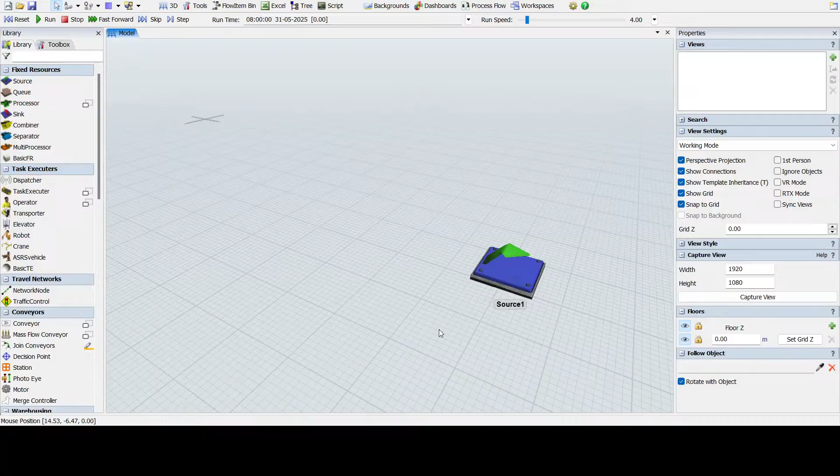Yes, and I hope these technologies and tools would have been taught in schools and colleges at my time, but currently now they have started teaching these in the colleges as well, and in the universities as well. And yes, we have reached our time, that is 8:15, and here we start the session.

Okay, so you see here we have the source being placed. Source is from the category of the fixed resource. I'll just remove that. This is our FlexSim model environment. Okay, and if you could see what we have, Amira.

Hello, hi. What is the plan of this live? What will we see about task executors? Great, so let me just talk about what we are going to have today with the task executors, right? So thanks, I'll just put that thanks. Thank you, Amira.

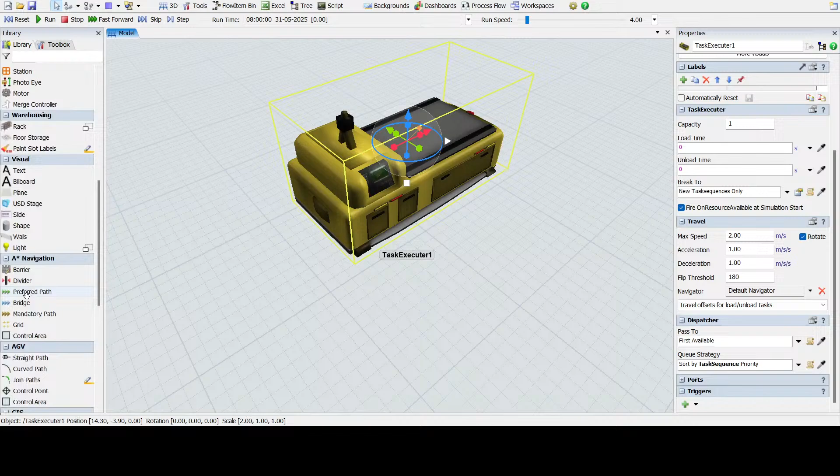And now let's go ahead, beginning with the task executor. So I have already created detailed videos about everything - what is this task executor, the properties, capacities. You can look into the playlist. I have done that already for all the elements available here, and the videos are still going on, and more new videos are going to be coming continuously on the LeanSimCorp channel.

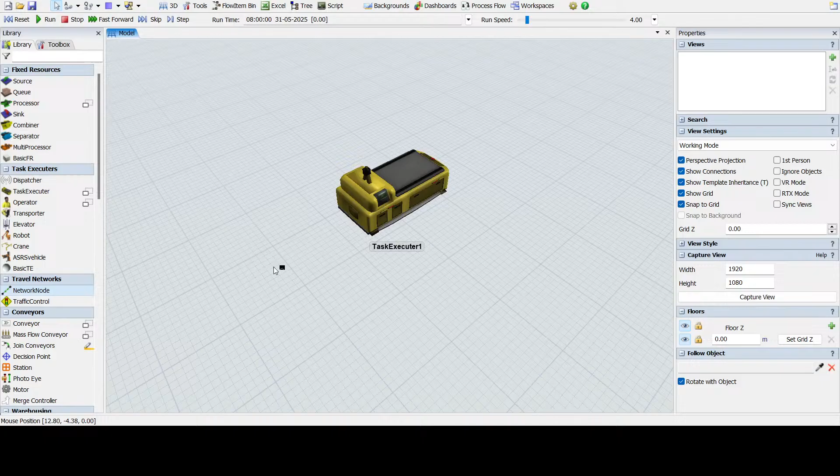What we are going to do, as I mentioned, is look into the difference between the network nodes and the task executor, AGV. So let's create a small setup.

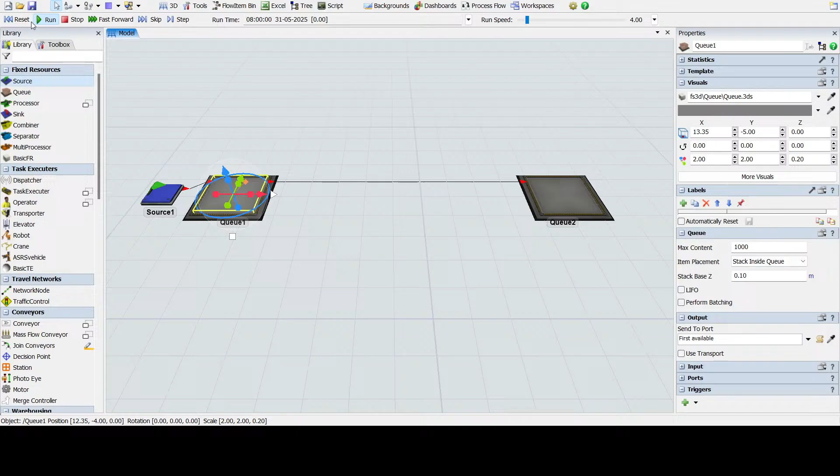Initially I'll just reset and run. You're directly going to get the boxes, right? But if you want to have the boxes transferred by different types of entities, then you're going to use the task executors.

Let us use the operator first, who is going to transfer the parts from the queue to this particular area. If I check this, use transport, he is basically going to transfer this material, like you already know about this.

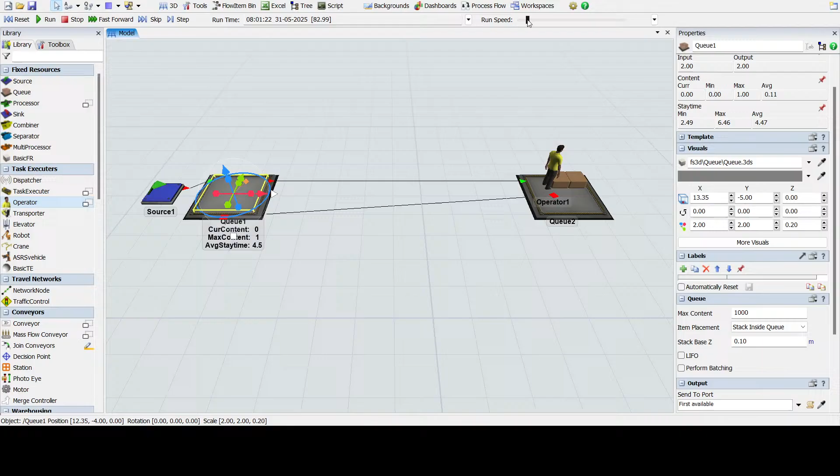Now the operator goes. If you see here, the difference is that the task executor goes with the shortest path possible, the least distance. It will basically go diagonal or a straight path, so the least travel distance required would be followed by this operator.

Now I'll just delete this operator and let us bring in a robot. Say this robot is going to be used for transferring the material from one area to another. But now, what do you see here?

The difference, right? This robot is directly putting this thing from here to here. I don't know from where it is going, it might be going through the air. So that's not a good thing.

Now what you need to do is use the six-axis robot. You want this robot to not only pick this up from here, but also travel and place it down, right? Great, so that's what we are going to make now.

Going into the network nodes, I am dragging out a network node here. Let me move this out, and I am making this a pathway. All these are done by the A connection. If you don't know how to make this, you need to use the A connection, where you connect to this node, and you also need to connect this queue to this node.

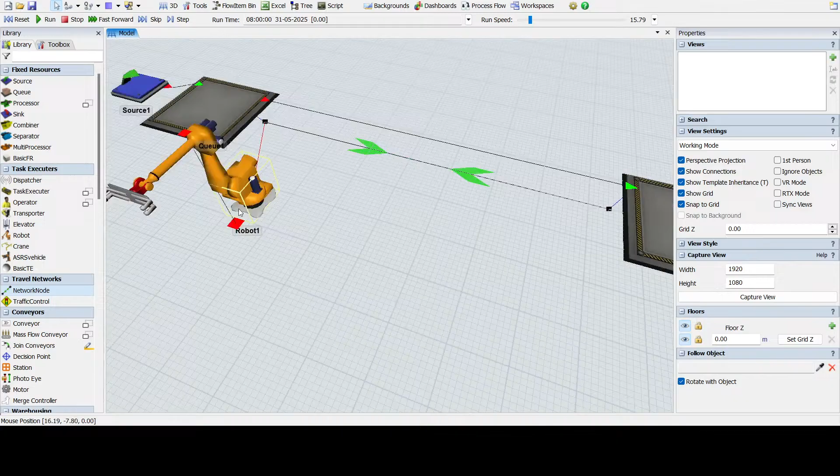The blue colors are for the objects which are going to be connected. Red color is for the task executors. So now we'll just reset this and run it.

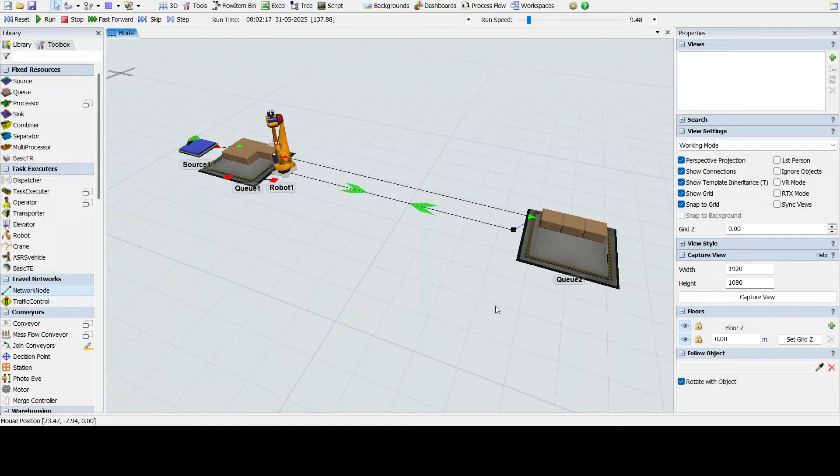So what's happening now, guys? He is moving to the particular location, picking that up, and then unloading it. There must be claps and likes, come on.

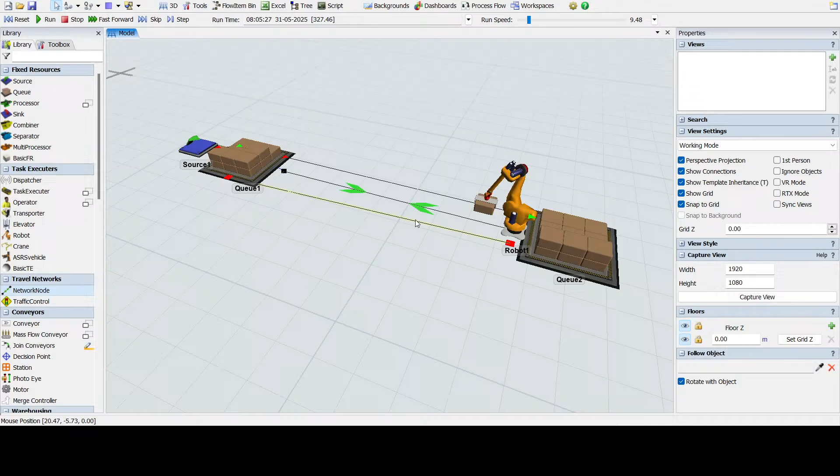So here is what we have - this way the robot can also be used in order to transfer the material from one part to another location. So you can use this six-axis robot in this manner if you want to transfer the materials accordingly.

Now what we are going to do is, I'll just remove this robot. In robot, you can see there are multiple stuffs here. We already mentioned in the video where we had robot put it into, but there are multiple triggers here as well. These triggers are very helpful if you want to perform specific things onto the object or onto the robot based on the triggers you had.

Let me see what's going on here. Amira asks, in this step, can we use the emulated variables from the process flow to control it?

Yes, definitely. So what you can also do is use emulation - you're going to use this variable right here, and this one, and here probably you're going to have this OPC UA, OPC DA.

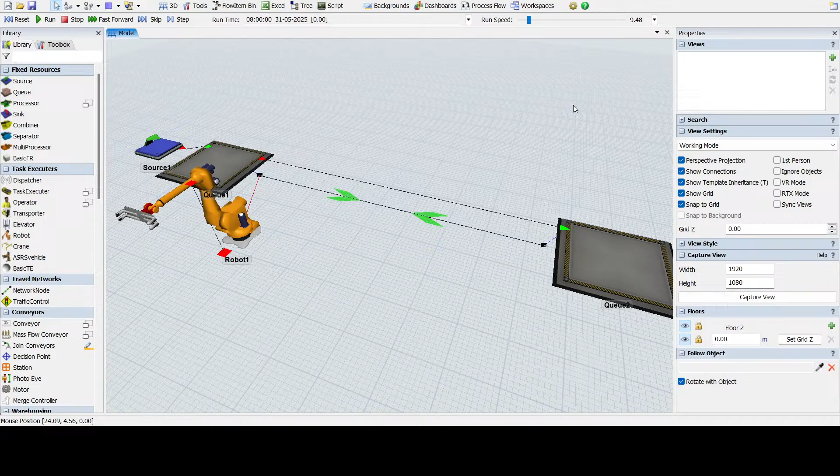Here you need to write an event. Whenever you're going to get a detail from your server saying you're going to have say 1, then your robot should start. If it comes 2, then your robot should move. So what happens in emulation, you just need to fetch the value, 1, 0, boolean, whatever you're going to get it from the PLC and the server. But the backend coding you need to do in that process flow or in that variable. You need to send the message, then from the message you need to control the start and stop.

To answer your question, it is possible. What you mentioned is, in this step, can we use emulated variables? Yes, we can use emulated variables, but just to move the robot, to tell it okay you start moving now, okay you stop now, that you can do here.

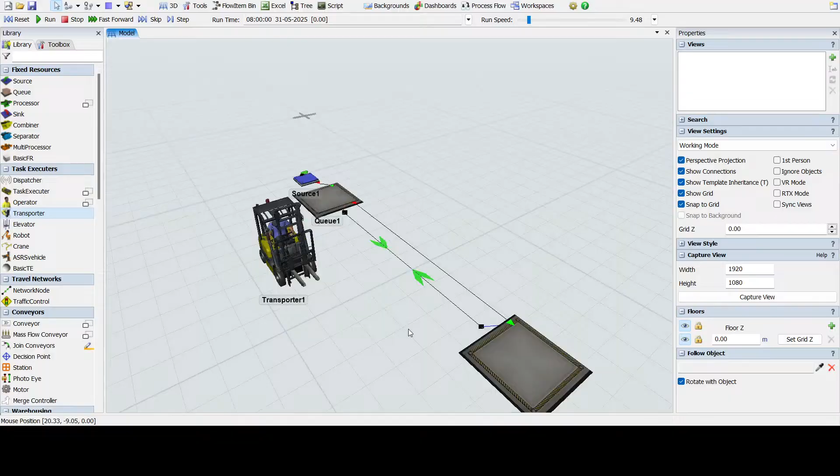So what I'm going to do now is let us delete this robot. What I wanted to say is that if I just put in this task executor and connect this, this is a forklift now. When I just reset and run this, I'll just move this here and show you how it is moving.

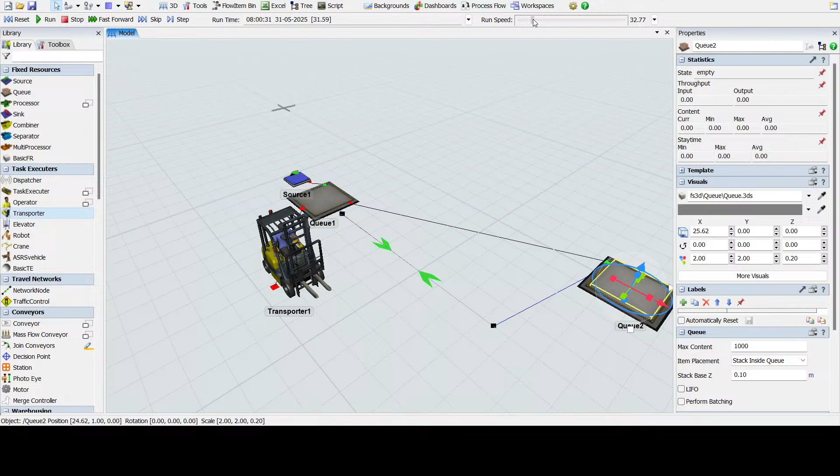So this task executor, if you see, he is not following this path. Why? Because we didn't connect to that. So it will be going this way, that is the shortest distance I have mentioned, that is what he is going to follow.

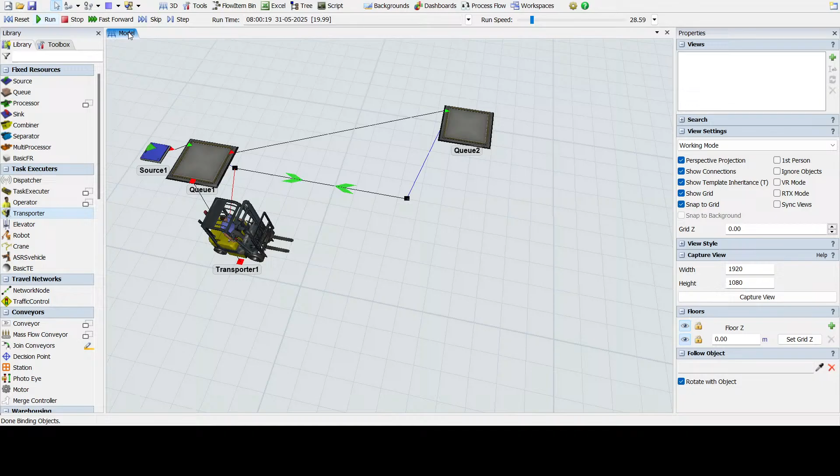So you need to be very specific that you need to connect both these objects here, and also the forklift to this area here, then only he is going to travel through that area and use that particular path. This way it's going to be carried out.

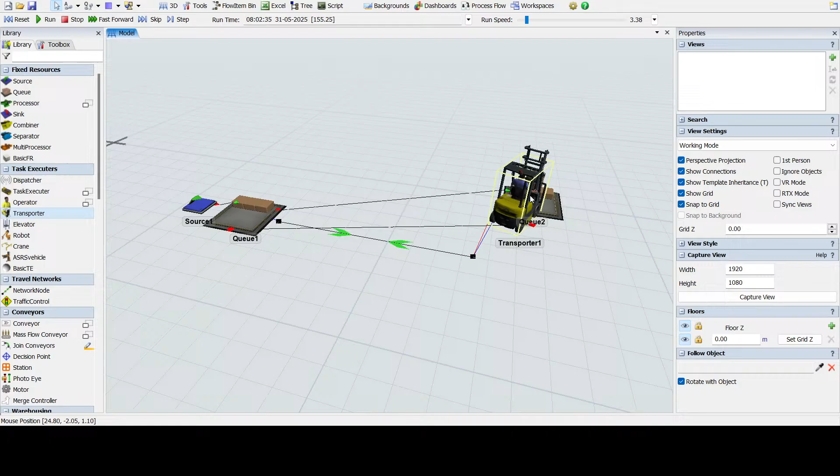Now say you're going to need multiple stuffs in there, like multiple parts together. This is also possible, it's just a matter of changing the capacity of that.

Now what we are going to do, similarly it is for crane, so crane doesn't require anything. Then when we talk about this related to network node, the important part I wanted to show you was that the robot can move from one place to another using the network node.

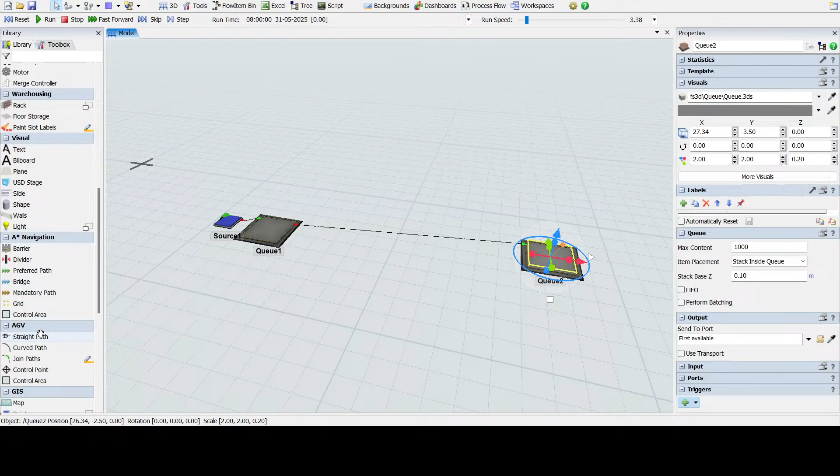It's very helpful. Now what we are going to look into is we are going to check about the AGV now. Let me just remove this and create an AGV network. Again, AGV is basically a different path structure out there, but the AGV comes under task executor, only the paths are different.

So I am now creating this curved path here, and I am now putting in the control points out in there, here are my control points.

Now we need to connect this control point with my objects there, and I am going to bring in my AGV, that is the task executor, again in the task executor here. Yes, you are going to have trucks, airplanes and all these perform accordingly.

Now what we are going to do is we are going to connect this AGV task executor there, the travel location out there. Now let us check whether my AGV is transferring the material for this AGV particular path, let me just run and show you.

We are going to look at multiple interesting stuffs for this AGV, so do not miss even a minute now. I'm just running this. Our task executor has started moving out, it will come at this control point, pick it up, go to that area and unload this.

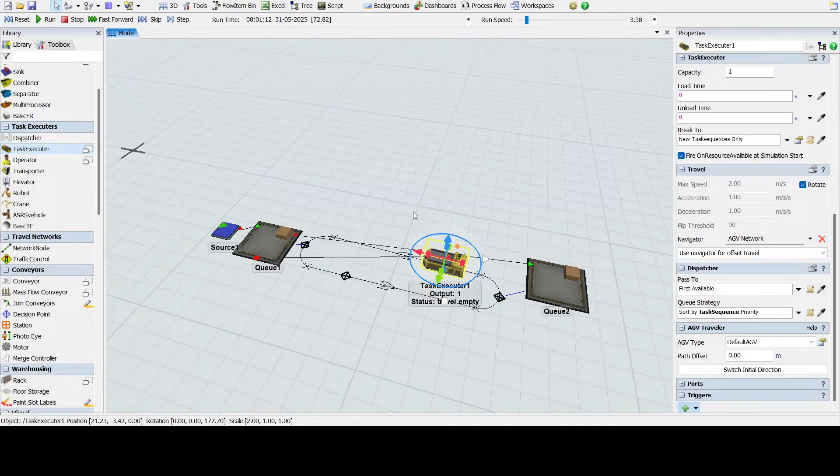So now this task executor. The biggest thing I was thinking about is why is this way? You cannot enter your speeds for the AGV here, so how can I change the AGV speed? The AGV speed now needs to be changed by right clicking on your AGV network and then coming to this area out here.

Now here comes your complete AGV network properties, which is very different from your network node stuff. The network node stuff is just nodes placed out there and you're connecting those and it's moving. When we talk about the AGV path, it's a complete bomb of everything, that particular stuff.

So if you look in here, we are going to have different stuff. You're going to have accelerations, you're going to have the speeds. You can modify those forward speeds and reverse speeds. You're going to have the battery usage here, and you're going to have rotation speeds as well.

Now the units are going to be similar to what your model units are. Whatever your model units were, like if you go to the model settings, meter per second, it's meter per second squared, it's meter per second, and batteries are in amperes.

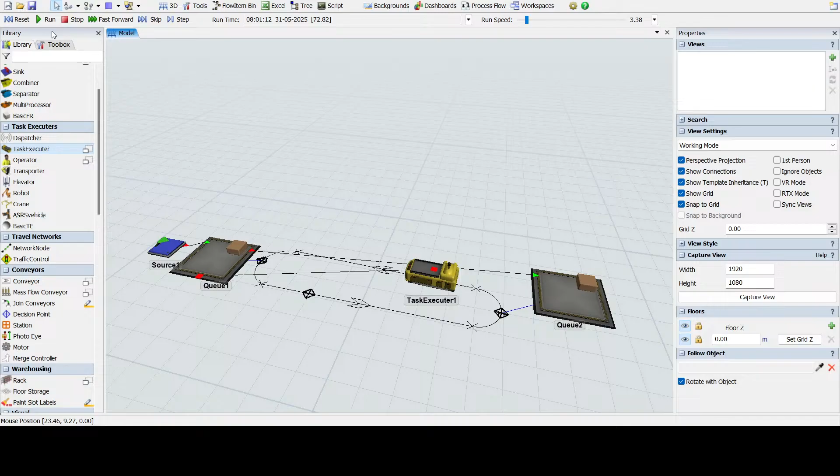Change the capacity of this AGV to 3, and I'm just resetting and running this. What happened is, even though the capacity is 3, nothing is happening.

Let's do this now, I'll change this interval to every 2 seconds, and then we are going to have multiple parts. I want to show you something interesting now. So the 3 parts are now coming on the top.

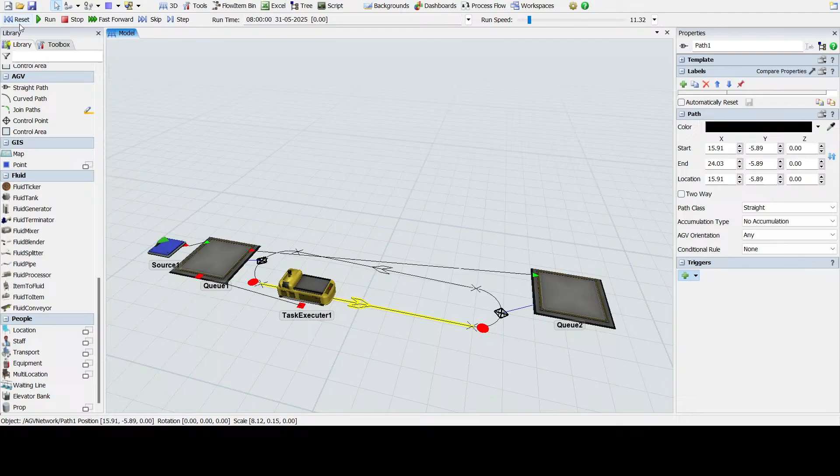What if I want to make it as a tugger? I want to make a tugger, but visualize it as a tugger - not a pure tugger, it will just be looking like a tugger. Let's go into the AGV network properties. We are going to attach it as a trailer, reset this, and run it.

Yes, just look at this guys. You're going to have this train-like structure moving behind, and that's going to be a particular thing like this. What you can also do is attach empty carts to this AGV.

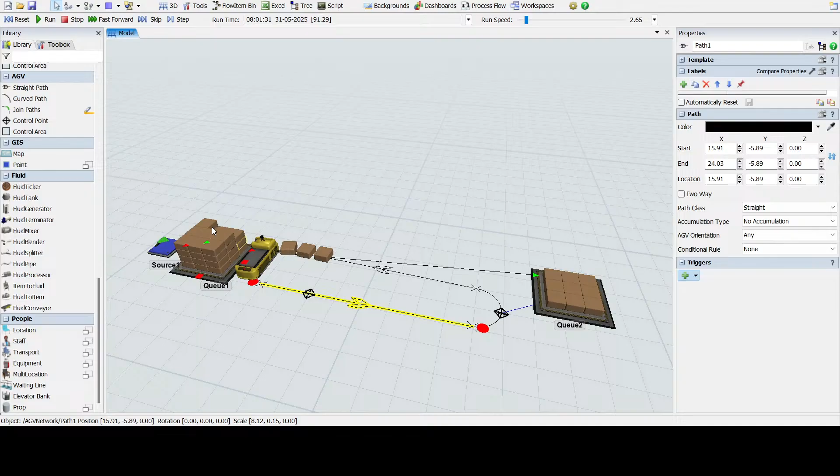Boris says something - excellent explanation about Flexsim, I'm following you from Bolivia, we have several people who are going to follow you. Thank you, thank you very much Boris. I really love you, please share with your contacts, multiple people, several people, and let us make them part of our family, right? I really love you, thank you, thanks a lot.

Let me give you this great emoji. Okay great, thank you, so okay great.

So we have this tugger been made. So I was talking about that, you can have this empty cart, and in that empty cart you can put in these boxes, and then these boxes will be transferred ahead. But this is the simplest way to analyze how this tugger is going to behave.

Now when you go here, you're going to have battery, idle, and recharge settings. So whatever rates you want to put, like one point mentioned was AGV charging logic - you can check here what your idle rate of discharge is. You can get it from the vendor details and put it here: the recharge rate, the idle usage rate, and the capacity rate. These rates you can put in, and based on that, the AGVs are going to be discharged and charged.

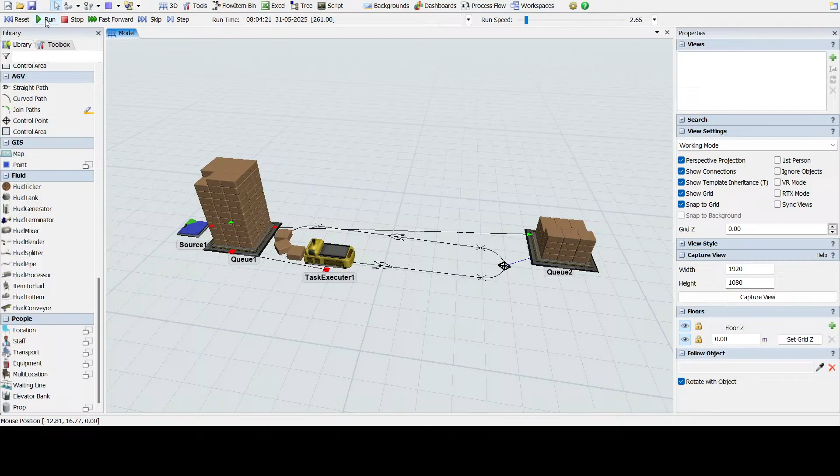Now say for example you want to put in the AGV battery details onto it. Let us do that now. What we are going to do is, on load, whenever my AGV is going to get loaded, I am going to put a battery details onto my AGV. Okay, so here I go, I put in a label. Let me put a label of battery level.

Okay, and yes, let me copy this. Okay, now what I am going to suppose to be making is, okay, so let me put this as integer battery level. Basically I'll put it double because then I also need it like 99.25, 99.5, right?

So here I'm putting like AGV dot, you're going to get this. AGV is going to be your current. AGV equal to current. Let me just close this. AGV dot, you're going to now have battery level. Okay, great.

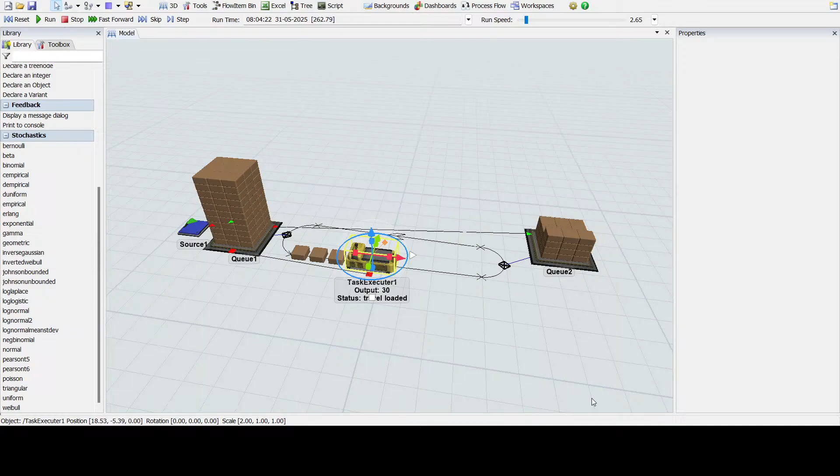Okay, so now what I'm going to do is I'm going to print in the label value of this, as the battery level here. So let me make this okay, and let me make this run, and let us check how much battery you are going to get onto the AGV from that, if we were to check that out.

Oh, one second, what happened is current dot battery level, here I put in current dot. So here basically I'm just closing this and I'm just resetting this.

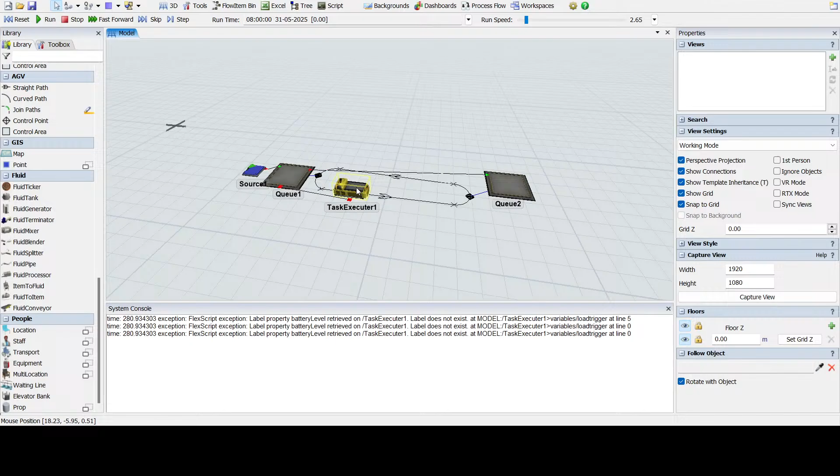AGV equal to TE dot, okay. So let me check with the syntax and I'll just come back. I don't remember that now. One second, I'll just check that.

Here comes the AGV syntax out, and here I open that. Okay, great. So now I just click on this, okay, and now what I do is double battery is equal to AGV dot, these properties is what we should get in. Okay, so let us look at this.

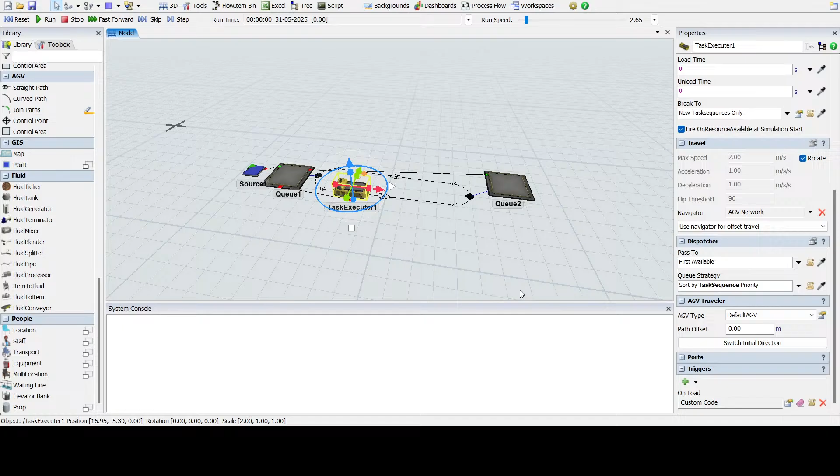What has happened is AGV was defined as AGV, which is equal to again AGV as a current. Now if you see, I am now able to apply the properties of the AGV to this, so now we are going to get the battery level, guys. Okay, so here I put it here, and then what I'm going to do is current dot battery level is equal to the battery level. Okay, so we have got a value for the AGV's battery level, and then we have placed copy pasted it onto that. So you need to remember the syntax: AGV equal to AGV current, then only you're going to reference this AGV with its properties of the AGV.

Okay, great. So now I'm just resetting this, and I'm running this. Okay, I'm just running this. No errors now, it's errorless. And here comes the battery level, that's 99.87. Okay, this is how you can check the battery level of yourself.

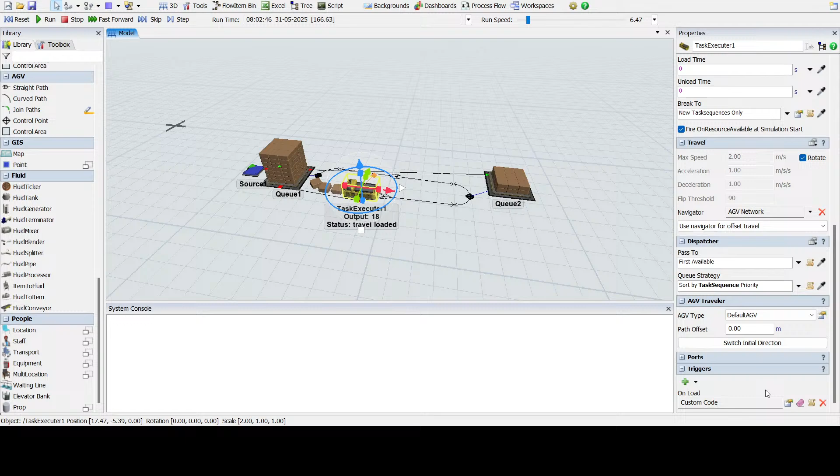And whenever your battery level falls below something, you can put in another logic for that particular thing and ask it to travel to that particular location and stuffs related to it.

Okay, so now let us come back and understand what are the differences in the AGV network. What you can do: you can attach the loads at the trailer, you can mention the gaps. You can put in your charging details here, which we just saw how it is visible. In the control points, you are going to have these different process flow details you are going to put in. Accumulation types, here you are going to put in proximity detection, like when your AGV should stop, at what trailing edges, and details related to what should be the intersection stop points. So it is based on the modeling part. This is based on the proximity part.

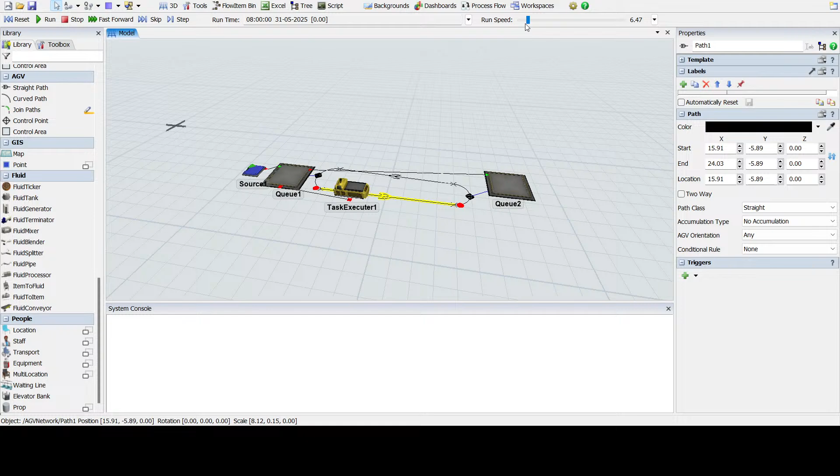When you go to the deallocation stuffs, that's nothing but a very important point, because on that it's what we are going to have different steps being taken care of. So one thing I'll just show you, if your simulation model is not getting this detail.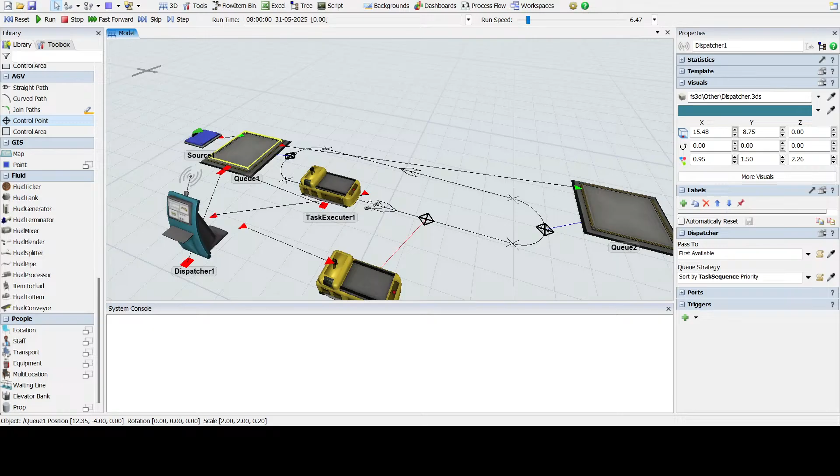I'll just put in a control point and another AGV out in there. Okay, so we have two AGVs now, and let me put in a dispatcher to be connected here to this queue, and from this queue we are going to connect it to the AGV, and let me just remove the AGV connected there. Okay, now when I reset this and when I run this, what are you going to see?

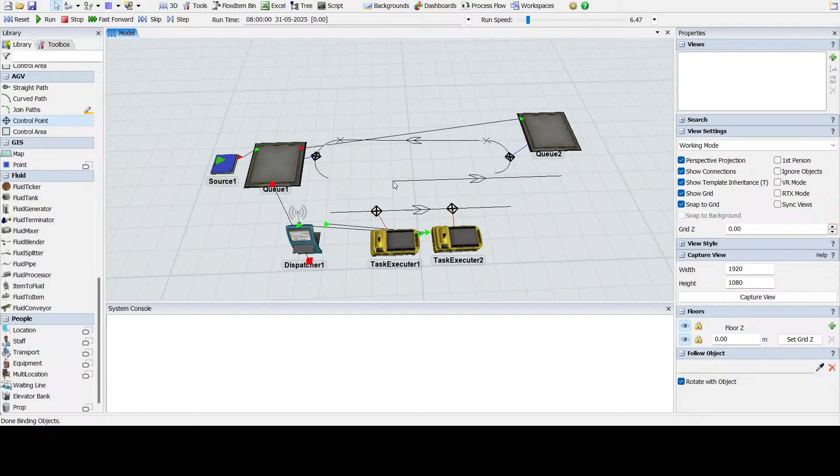Okay, it's going to be very critical now. So what we are going to do is have these different paths out here. Let me put in control points. Where are the control points? Yeah, here: 1, 2, 3, 4 and 5, right?

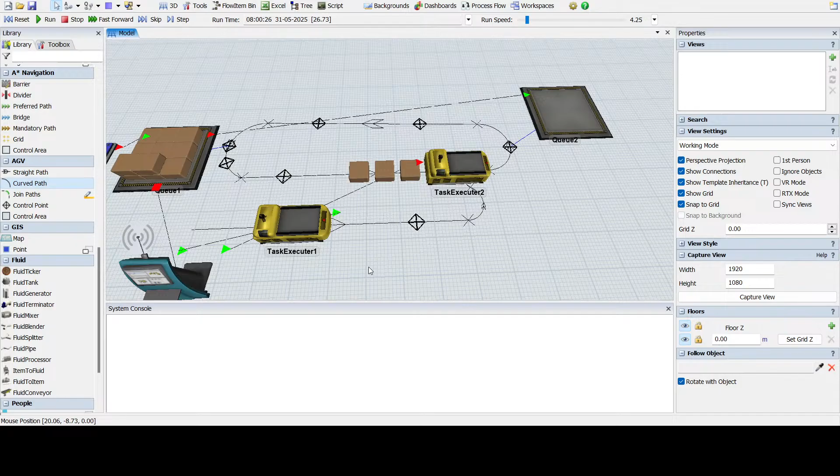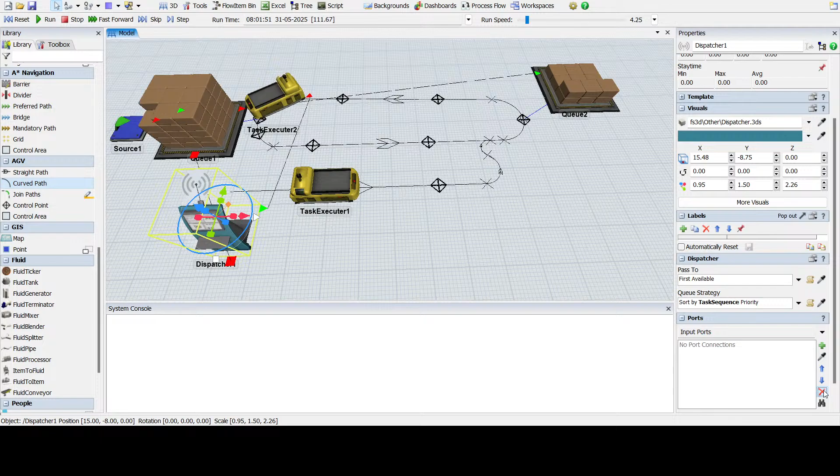Now if I just look at this, here I go into the output. I have only task executor 2, no task executor 1. Task executor 1 got connected to my first port, so my second AGV is not going. So let us connect that.

Okay, let us reset and run now. Okay, so now my two AGVs are moving, guys. You see this? Two AGVs are moving.

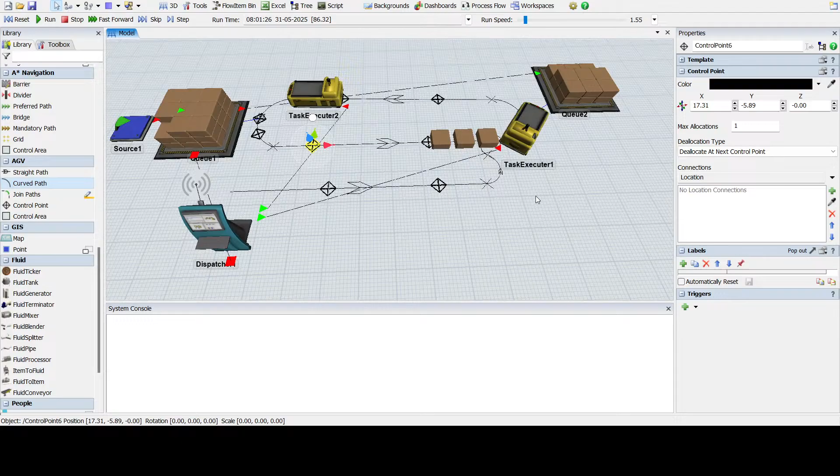Now what I want to show you is how they are moving from the control point. Just look at that. On the control point, when you click in, you see this deallocated at the next control point. So unless your AGV reaches the next control point, it is not going to leave that, and because of that your throughput is going to get reduced. Your AGVs are going to have a lot of blockage. So what do you need to do?

I'll just show you one example. Let us delete these control points now and just show you. Let us see if it is possible to have a state dashboard. I'll just stop that, reset, and let us put in these two task executors into the details. I just want to show you the blocked one.

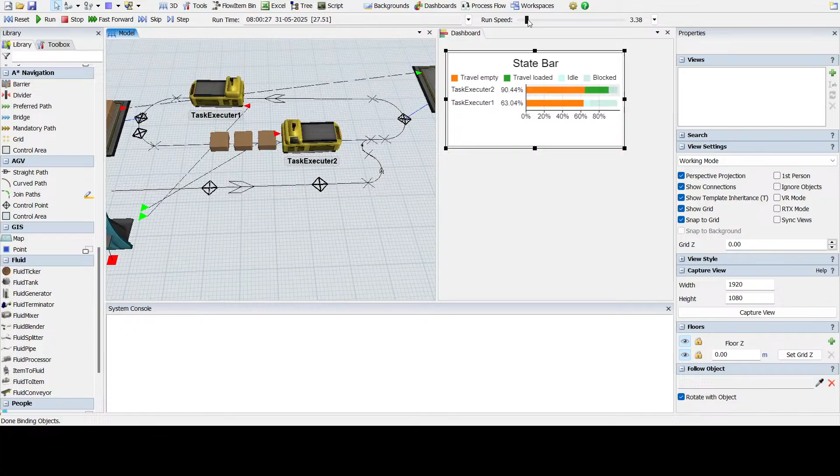Okay, so what happens is, you see this is all blocked because it says deallocate at the next control point. When you click on this when passed, you will see that the blockage will be minimum. So always try to have this - what is that - deallocate when passed.

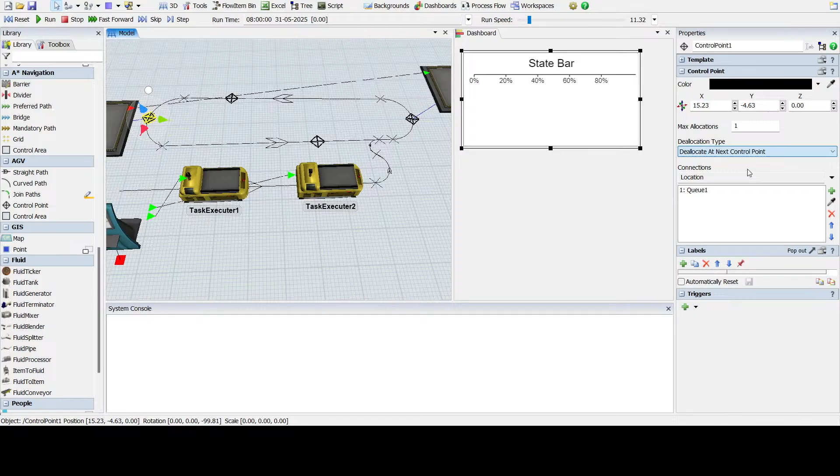The moment AGV is going to leave from that control point, we are going to have that movement coming backwards. So the blockage will completely go, and you will have the least amount of blockage available out there. So whenever you are using this AGV path, remember that the control point needs to be deallocated when passed, so you have minimum blockages on this route, helping you make this stuff quite great.

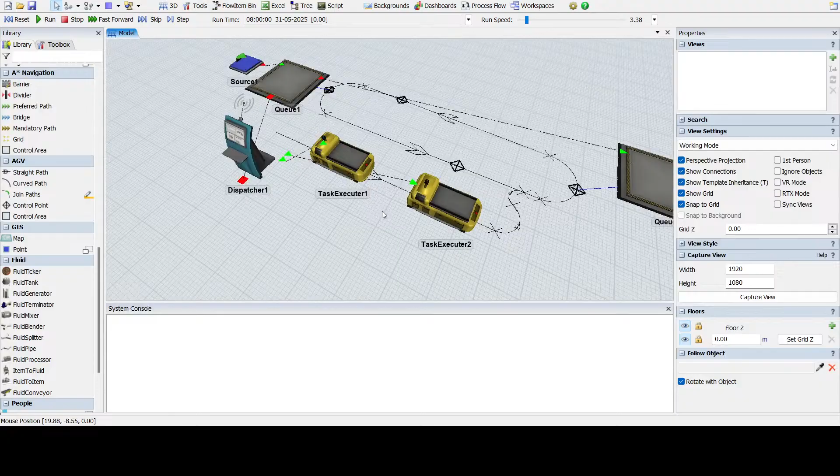Okay, so when we talk about the major difference between network nodes and AGV paths, both are going to be two-way, one-way, whatever that is. You're going to put in a speed limit for the network node, but here you are going to set up a complete speed for that particular AGV network. There is nothing like you are going to set it up for this path different, this path different. No. You can have different types of AGV types.

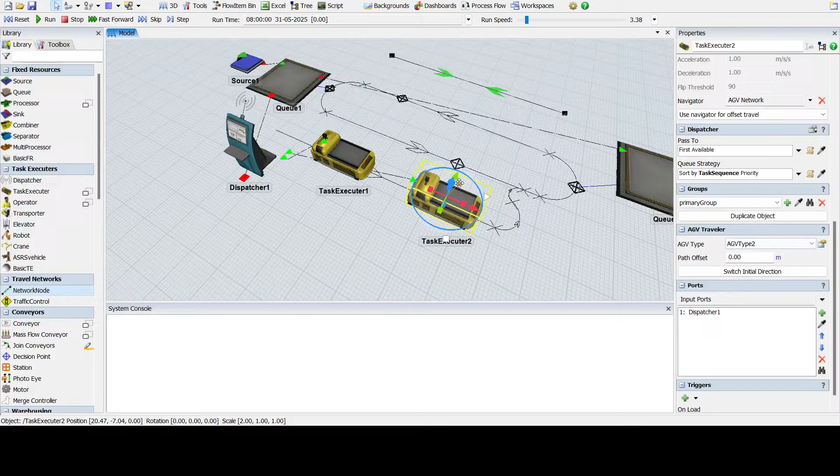AGV type path you can basically select, and you need to select from here, AGV type - which we just created, right? AGV type 2. If you want to have AGV type 2, use that, but again that is for the particular speeds which we just made for that. But you cannot have different types of speeds at these different sections in this AGV network.

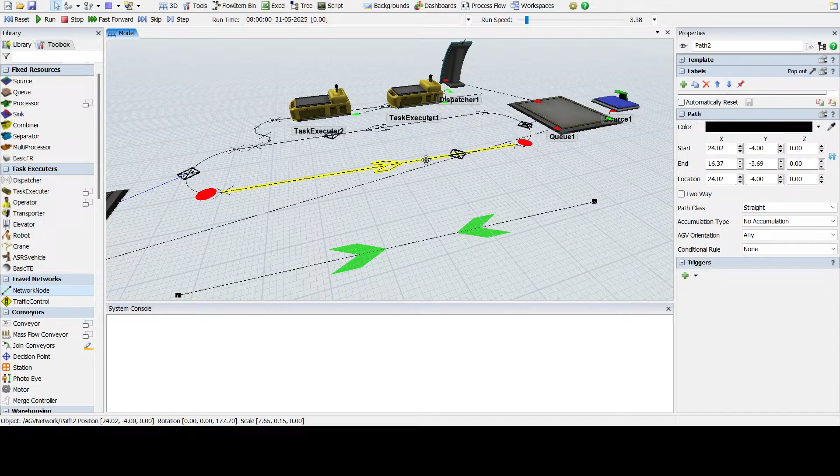But here you are having the option in the network node which you can place that. So when you click on this, you see speed limits are there - the maximum speed that a traveler can travel along these connections in meters per second. The disadvantage of the network node is that you cannot put in your curved speed, you cannot put the charging details, you cannot put your trailers and things like that which you can do in the AGV network. So you can use AGVs on this network node as well and on this AGV as well.

Let me know in the comment section whether you want to see that AGV run on the network node. If not, I will skip this and go ahead.

Okay, what is Boris saying? Excellent, we are going to write you - inbox a strong hug from Bolivia. Thank you, thanks a lot, Boris. Lots of love from me as well. Thank you.

Love you. Okay, great.

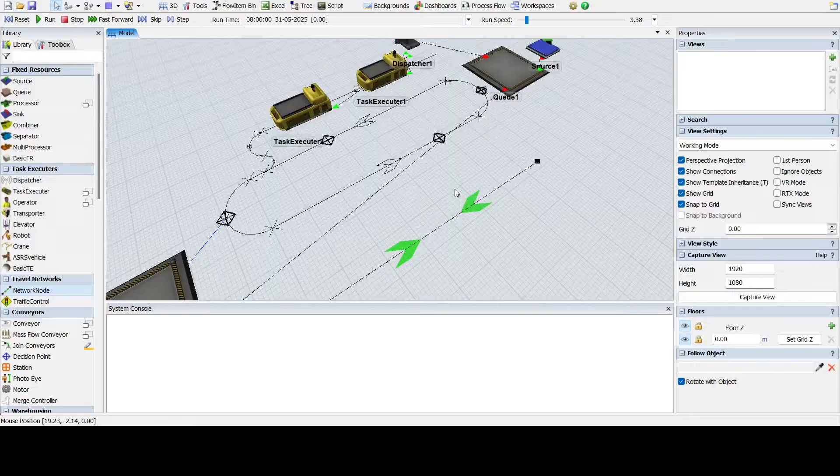Let us use AGV heat map. So heat maps you can also do onto the network nodes. Basically, if you want to create a heat map when your AGVs are running onto your network nodes, that is also possible. You can do that, but it takes a lot of time and requires backend coding and scripting. We'll do that later, but just for your information, let me know in the comment section if you want that.

Okay, great, let us have this model standing here, and what we are going to do now is create another source and another queue, and let me just connect this to this queue.

What we're going to do is send the parts to these different types of queues based on the percentage. So for send to port, you need to go here to have a by percentage ratio. So what do you tell it? 80% of the parts will go to port 1, 20% will go to port 2. Okay, let us do this.

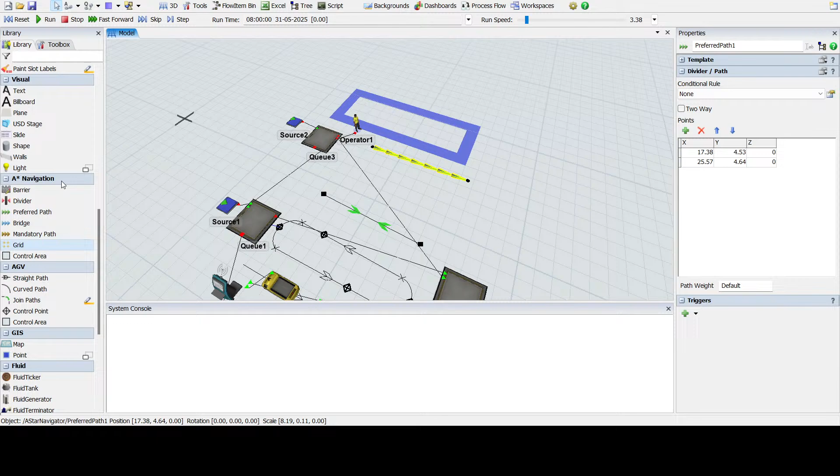So if I just put in a grid, here comes a grid. So here comes your AGV grid, here comes your preferred path. These are all A star detailings which you can use. This preferred path is going to be like a magnet, just like a preferred path. It is going to be a bridge, a mandatory path, and you are going to have control.

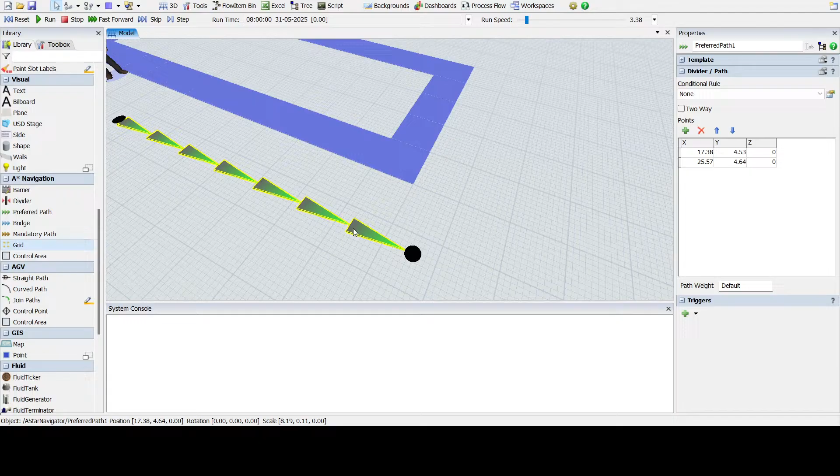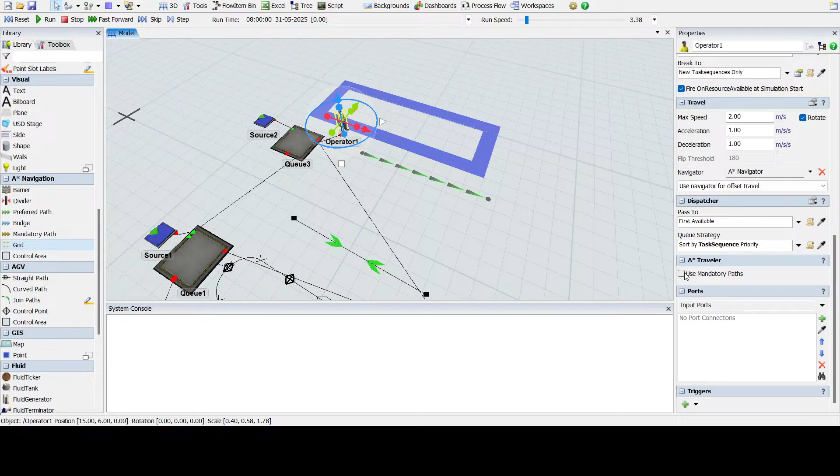But the big thing is there's a lot to remember in FlexSim, and things need to come out the right way. What I am searching for now is the A star navigation property window. Here, if you are using A star, you get this mandatory path option. You can check this if you want the AGV or operator to travel based on that.

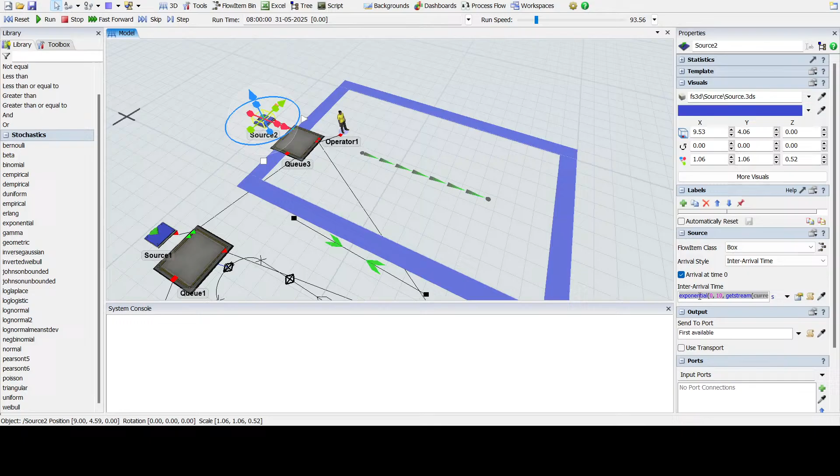So I'm running this now, let's see how it goes. Oh, I'm not getting anything from the source. So now what I'm going to do is show you a heat map, let us see that. Wow, why am I not getting it? Oh, probably we haven't checked this. Okay, we checked it now, so now the operator must be utilized. Wow, now the operator is moving.

So if you see here, this is the preferred path I have placed. But I haven't connected that operator to that preferred path, yet it still follows it. That's the power of A star navigation. If you had seen in the network node, you needed to connect that, right? Here, if you just select the AGV A star navigation, it's done, it's so great. You don't need to connect it again, there. It will automatically get connected to the AGV A star, whatever paths and detailings you have placed.

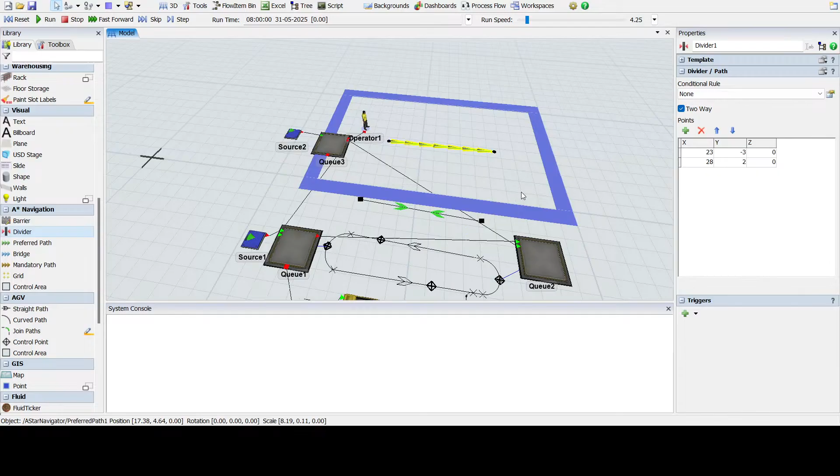Let me just put in a divider, because what I'm searching for now is I want to have that A star which used to initially come in our older versions, where A star used to be visible. I'm not able to see that now, I want to see that here in the A star navigator. Okay, great, A star navigator properties come in here in the tool, I am able to see that. So now these are the A star properties in here. Now all members are there, travel members are there, FR members are there.

What we are going to do is put in and start the heat map. So here the heat map is going to be started in A star navigator properties.

Okay, so guys, my throat is almost dry, let me have a sip of water. Okay.

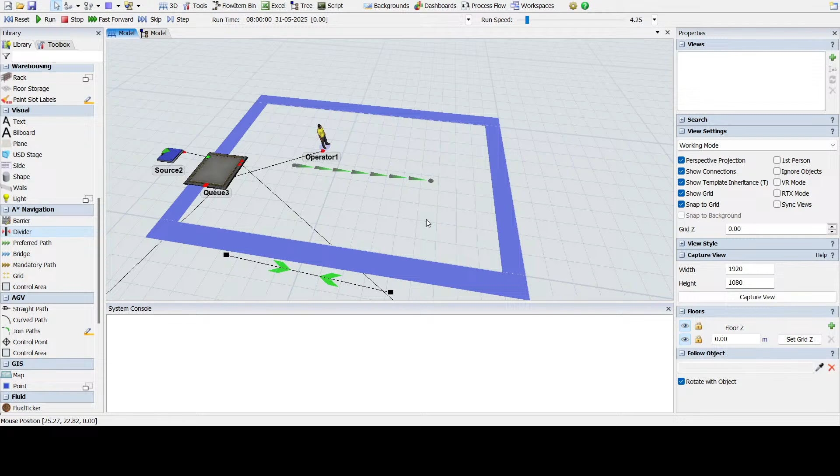Okay, great. So now let us check how the heat maps are going to be shown. Heat map colors also you can edit, but as of now we'll not do anything onto that. So I'm just running that.

Now what do you see? The operator is putting it into this area as well, only in this area, right? We need to make this grid bigger so you see everything. So let me reset and run this again.

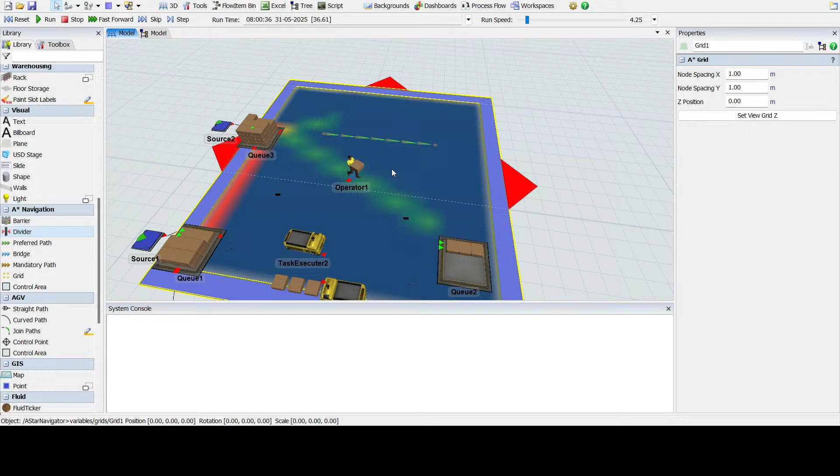Now here, if you see, the heat maps, this way you need to activate your heat maps from your A Star Navigator. I am just moving this, show allocations. Now you can see the allocations. This is the allocation power. So if you want to see the allocations, you need to check this out here. When you uncheck this, you are going to have the allocations shown as none. So what do you see here?

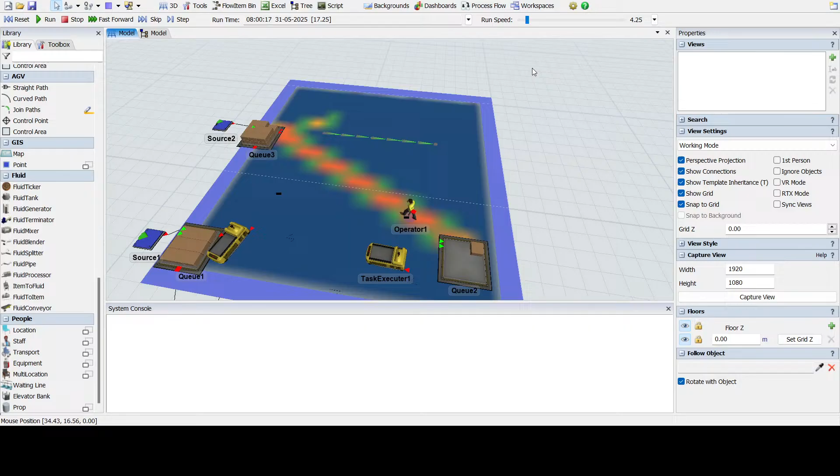You remember the percentage? We put it here 90% something, right? 80% and 20% here. You see this green is here and the red is here. Let us change and see what the heat maps give us if I make this complete opposite, 80% below and 20% on the top. Let us see what our heat maps look like.

So what is happening, guys? It's not showing you red. Why? Still it's showing you green. Can you let me know the answer in the comment section? Why is this happening? Why is it green? If you remember, we put it 80% here and it was complete red. Here it's still green even though the percentage is 80%, right? What might be the reason?

The reason is heat map depends upon the interval you are going to select. The intervals which you select are going to define that. So when we go into the conditional or the triggers in the visuals, the maximum heat value - this is traversals per time, average blockage time per traversal, percentage of the total time blocked, percentage of the total traversals. So how many times people are traveling through the particular area is what determines how your heat map is going to be visualized.

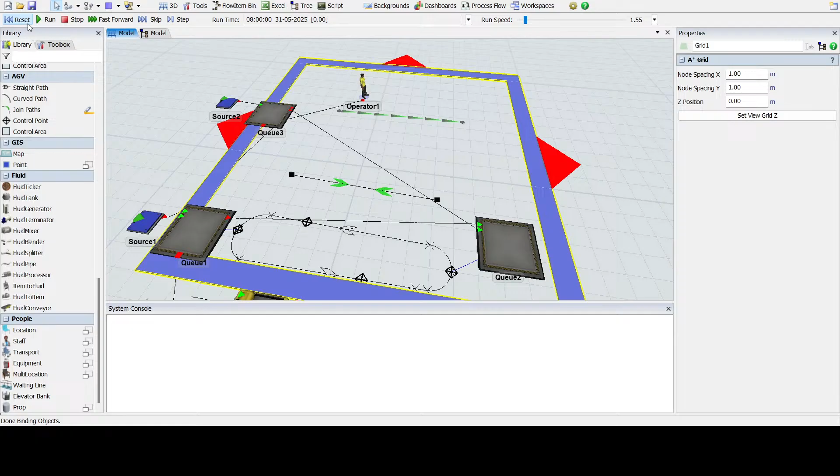So it depends on what traversal value you are going to put in there, the maximum heat value, in order to get the heat maps. You can also change the details in here.

This is really a good question, Boris. How could you graph the visual representation of a heat map? So basically, if you want to have a graph or a dashboard, or you need a value, both ways are possible.

You can get these details in terms of nodes. So basically when you go into this backend, you are going to have the details in the A star navigator properties, and there you are supposed to collect the details - the heat map total traversals, you look at this. There are a lot of details already fitted into this, you need to pull the details out from the tree. So what you can also do is get a number directly and feed that into the global table stating how many traversals you are going to have on this one, on that, or you need to.

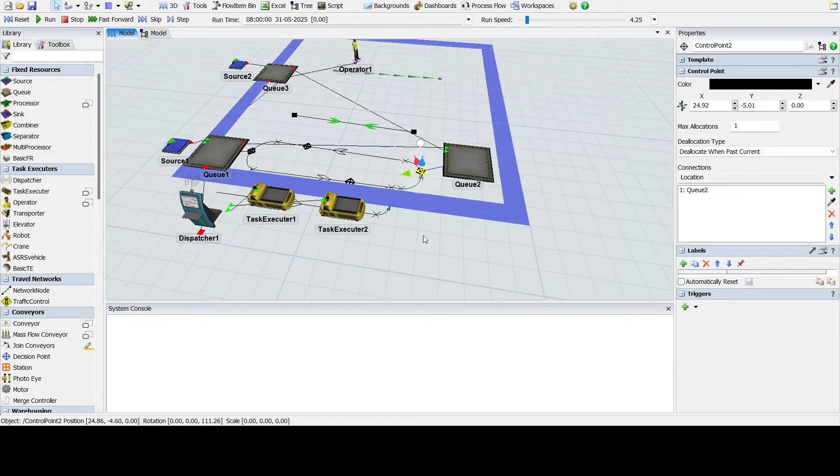Then the other point was about the different types of travels by operator. Okay, great. So we saw that the operator we used has been traveling from this preferred path automatically because he was connected to the AGV, A star network, right? Now, say I want to remove this from that particular AGV navigator. I want to use the default navigator. What he is going to use, let's see.

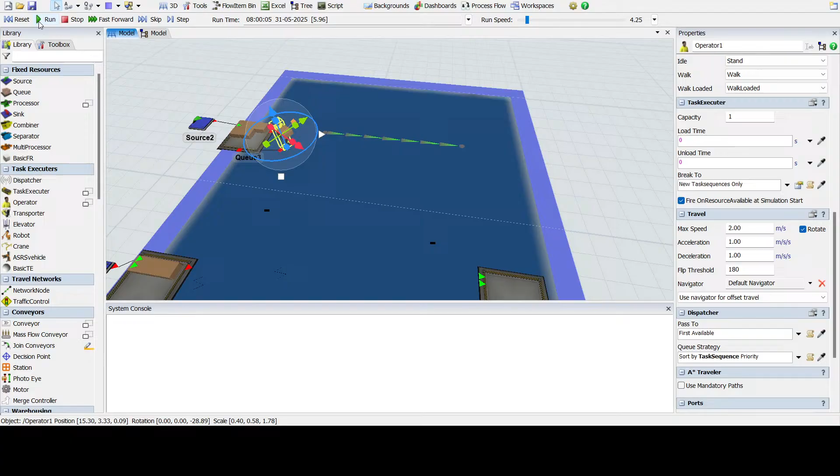Okay, see, this is the default navigator. Now, if I change this to default network navigator, you're going to get an error. Why? Because your operator is not connected to that. Even if your operator is connected to that, your queue is not connected to it. That's where you're going to get that error.

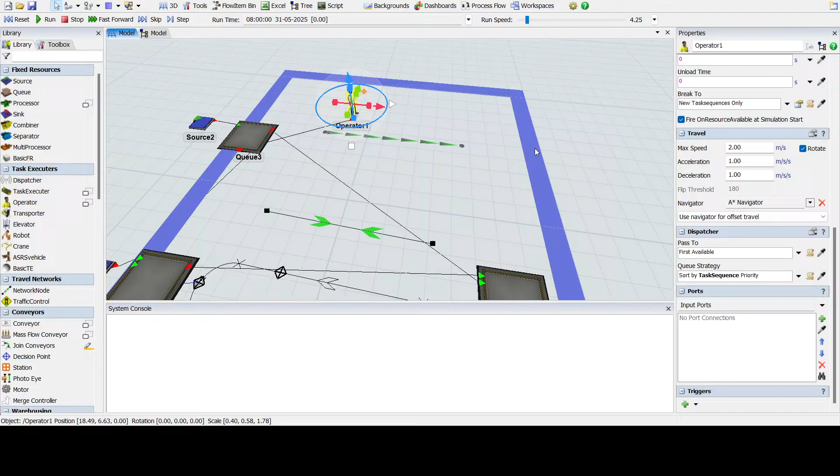So what I'm talking about is different types of travels by operator which you can make. So we saw you can use A star - directly if you see, if I put in an A star navigator, it is directly getting connected to A star. Okay, if I click here to the default network navigator, it is directly going to connect to that. If you are going to connect to AGV network, it is directly going to get connected to the AGV network out there. But the problem for us is that our queue is not connected to the AGV network.

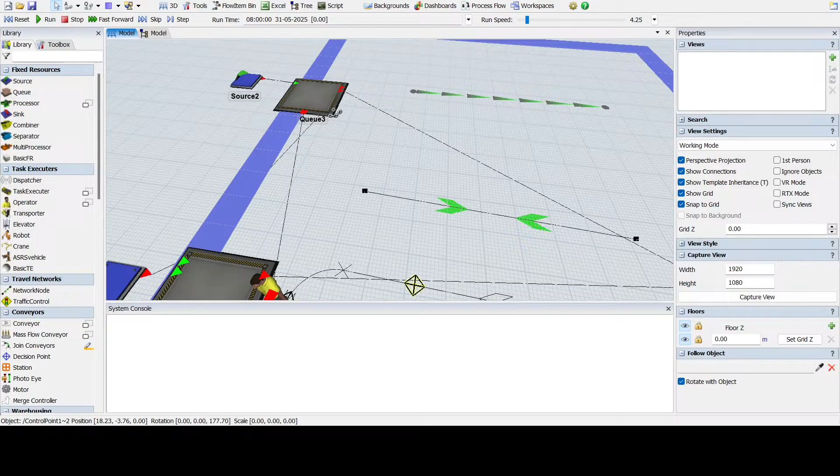Okay, so it is not that you're just going to use AGVs onto your AGV network. One second, let me just check, connect this. Okay, yeah.

See, the operator can also travel from the AGV network. It's not that only AGVs can travel. And if you could see this, it is also behaving like a trailer. So in FlexSim, it's all depending upon the path networks you are going to use. Here the operator is also functioning like an AGV. You see this? So it's not based on operator, it's based on the AGV network.

Okay, great. So this is what we saw - the best part of the network, the best part of the, what I can say, the routes - that operators can also run on the AGVs. Now, we need to do nothing more, right?

We just selected the AGV network and the operator came here. If I put in a default network, it will be disconnected from this, and my operator is free to deliver my parts irrespective of the paths he is going to have. Now, wow, look at this.

My operator is walking in a reverse direction. Now what we're going to do is check these four things. I hope you are aware, but if not, you can have a glimpse of this in a minute. So when we say do not travel offset, these are the details for this. Let us look here for the AGV.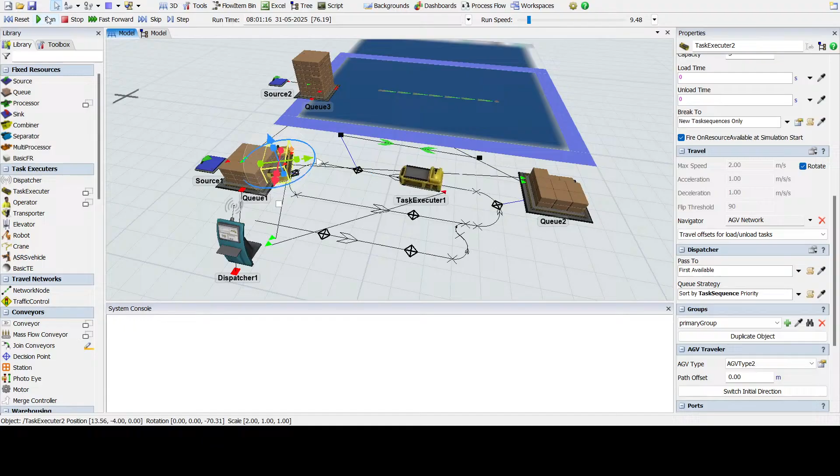Okay, nothing happens when I click on this. It's like travel, do not travel offset, use navigator offset, travel offset for load and unloads. See what was happening? Did you see this? What's happening?

So the AGV is now traveling outside from its area for loading and unloading. If you want to have that, you can use that. If you don't want that, change it to do not travel offset and it will not travel. Similarly, you can use do not travel offset, block spaces on the network nodes, and use navigator for the offset travel.

So I hope you now know how you can select the AGV network, or sorry, AGV path, AGV type basically. You need to click on the AGVs. I'll just reset this. You need to click on the AGVs and select the AGV type you are going to follow.

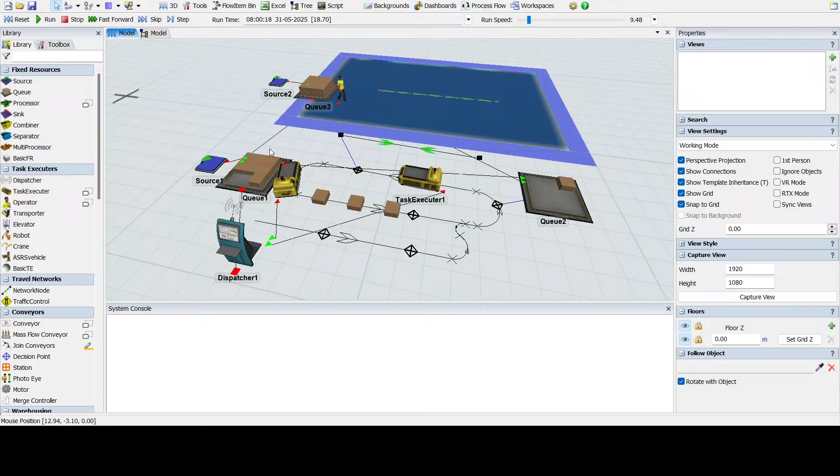Now if you want to change the direction of the AGV itself onto the AGV network, just click on this and you're going to have this AGV network. The AGV's directions being changed, you see this? This is how it is going to work. So these are different things you can do.

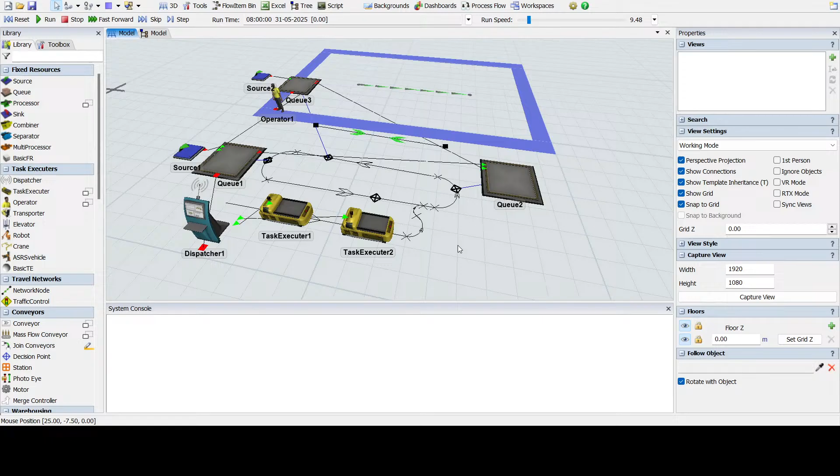So I'll tell you some bonus tips also, which can really help you apart from these task executors. Now we saw operator sharing. So now what we will do is let us remove the output from this.

And I'll just delete this. And going out here. Now what is going to happen is we are going to check how multiple operators can be used. So operator animations in short, AGV tugger done, forklift utilization for load and unload done, how to ask operator to pick exact.

So there are two or three things remaining: operator sharing task, operator picking up the exact items from the queue, and operator animations. We are going to have 5 to 10 minutes and then we will be closing our live session. Great, so let us do this thing now first.

Dispatcher here. Coming out here, dispatcher here. I just want to remove this now. Yes, and here, one here. Let me remove this, and a connection to the operator. Great.

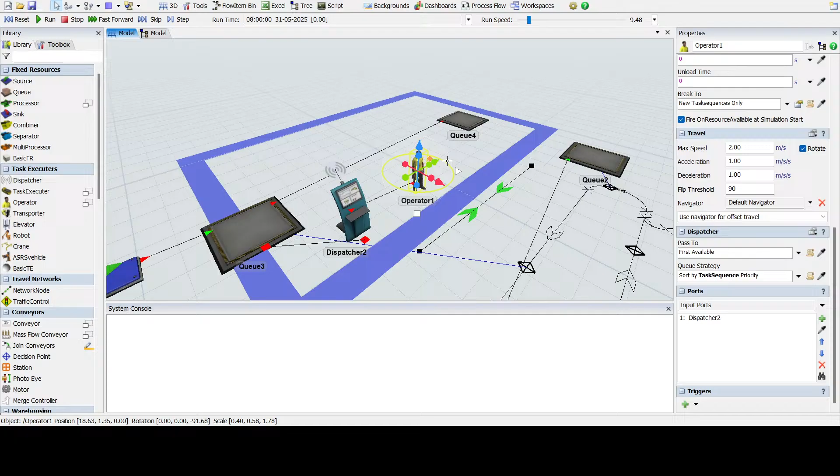We are going to have another operator here now. Yes, let me delete this. I cannot delete that, I am just moving that. So we have two operators here. I am just moving this, changing the sources, okay, reset and run. Okay, we have this.

Now in the comment section, you are going to tell me how I'm going to make these operators back to their working mode. Why are they walking in reverse? Why are they not walking? Why are they not turning back and coming back? You're going to let me know that in the comment section. That's going to be the assignment for you. Drop in your answer for why this is.

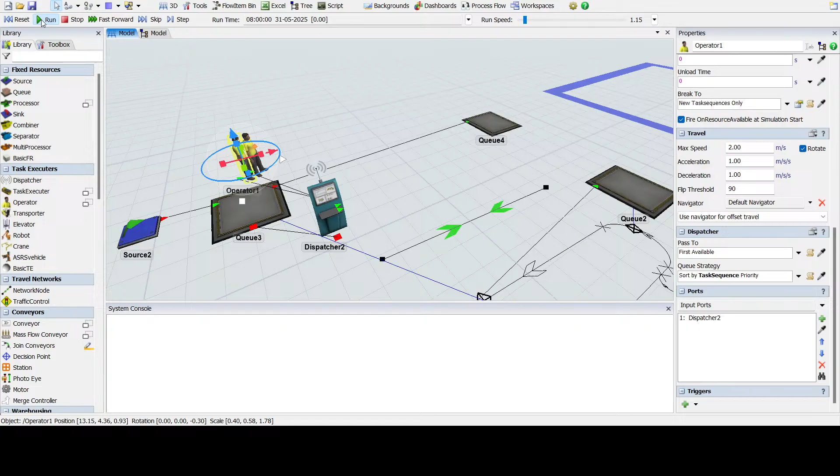I'll just show you the properties of the operators as well. You tell me why these operators are not turning back. Where is the answer? So I'm just running this. See, the operators are standing under the top position. Now these two operators are taking these parts together.

Now what we want to have is how we can have shared operators. Here comes the operator, here comes the operator. Tell me how I can make these operators turn. So this is your assignment, I hope you are going to do that.

Now what we are going to do is ask these two operators to pick up a single object. No more, what I can say, no more. I'll just make this first available. I want two operators to be lifting that particular part together. Before I tell that, let me know in the comment section whether you are already aware of that.

Are you aware that two operators would be lifting a single part? Do you know that?

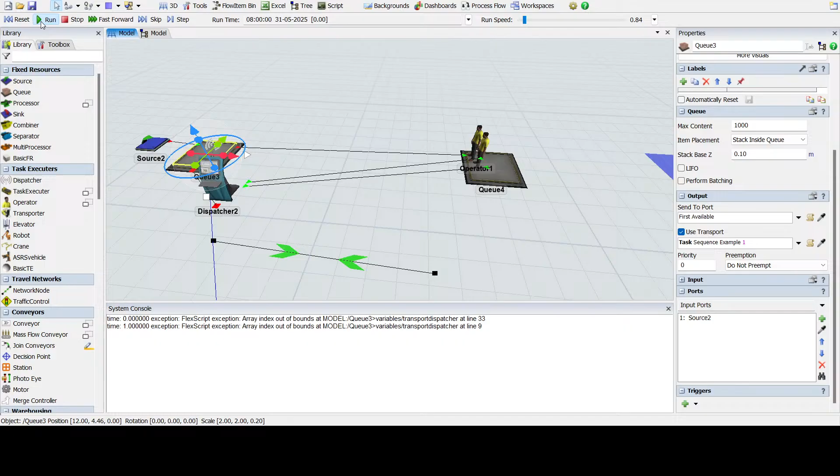Okay, so now let us do this coordinated task, task sequence example 1. Boris, great. So now here is your first task sequence example. What it states is we're going to have this thing, let's see what happens with two different stuffs. We are going to ask them together to pick up a single part. You have to do that by going into your custom task sequence. This example shows the code required to create a coordinated task that calls for two operators to transfer the same flow item.

So you need to use this coordinated task sequence example 1 by clicking onto this queue, going into use transport to make that. Again, you need to come here, check whether the center object is 1, and that has to be a dispatcher which is connected to the center port. Okay, that is what is going to happen, it's a predefined modular code into the system. And here it goes, guys, these two operators are transferring a single part together, and then they are going to do that again.

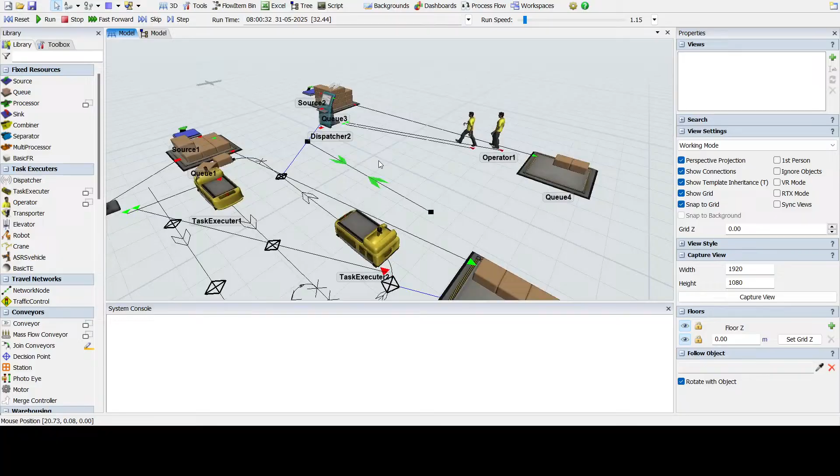Okay, great. So Boris, let me know a last question from you: what would you like to see at the end of this live session? Let me check if that is possible, and then we will be closing our today's grand live session on LeanSimCorp. Anything, let me know what you want to check out. So here we have all the multiple things, we are having this coordinated task taking place together.

Okay, what's up? Thank you. Thanks a lot, thanks a lot. Thanks a lot, Boris. The other concurrent viewer, can you also chat in?

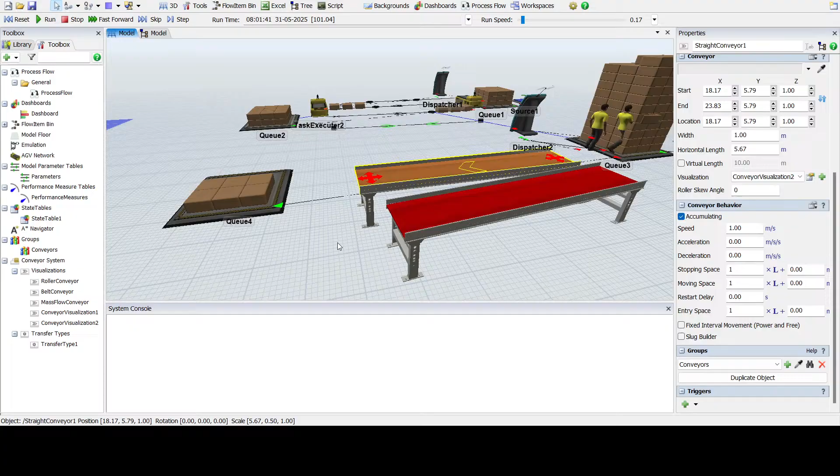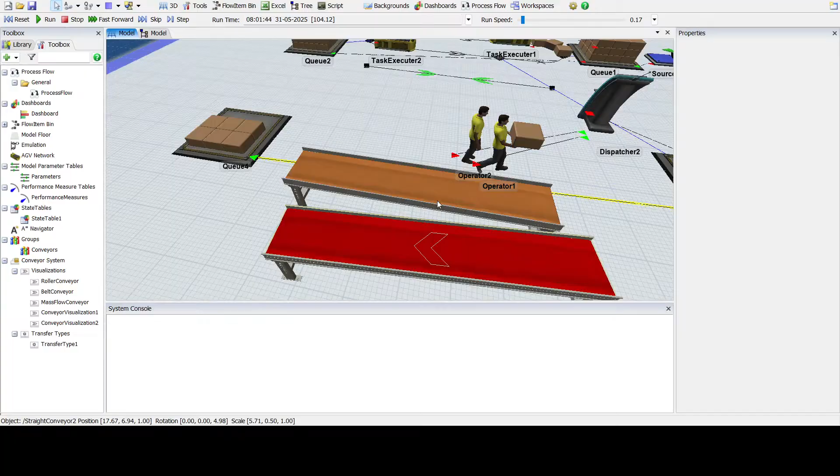So guys, the other concurrent viewer, did you see this, which I did just now? This is very important, and this is the bonus for you guys watching this live video: changing the color of the conveyors. It is really tricky, it was quite fantastic. Now you just look at it in a matter of seconds, but to find that out in a complete FlexSim environment, it's very, very difficult. So that is the bonus one for you.